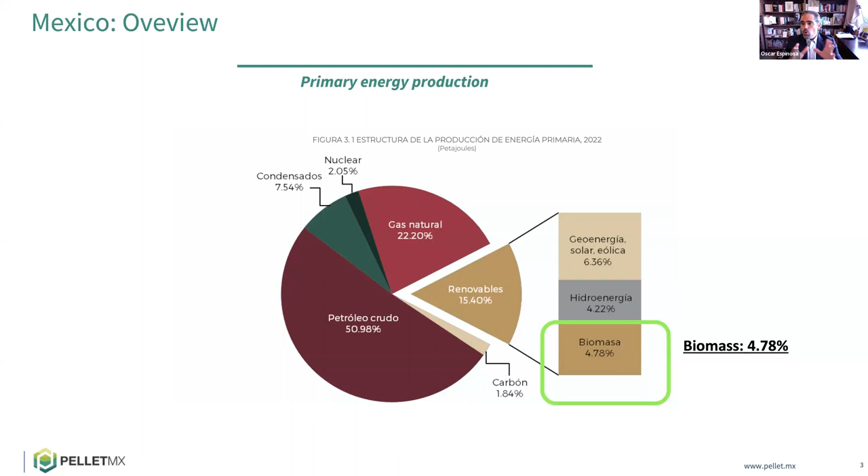We are accounting for 4.78% of biomass. Normally when you see this number, what you would see in Mexico is that the use of biomass would be traditional uses of biomass. Mostly, the most share of used biomass is wood for rural communities, cooking and heating with wood, traditional use of wood, and also cane bagasse that's been used for some years now in the sugarcane industry as a fuel for the production process. So as you can see, in Mexico we have a very small share of biomass in the primary energy production.

If we see the energy consumption in our country, in the domestic sector we can see a use of woody biomass at 24.6% of the total energy consumption. Regarding the industrial sector, we can see a participation of 4.21% of cane bagasse in the whole energy consumption matrix of the country.

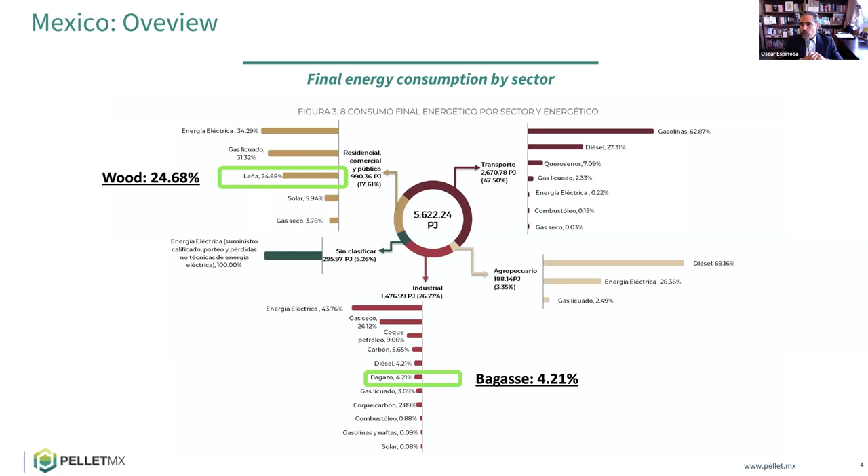So that being said, Mexico has a very wide opportunity regarding use of biomass, both processed biomass in solid biofuels like pellets. We are producing Pellet Mexico, and I'll introduce a little bit of our company afterwards. But what you can see is that the pellet production projects in Mexico are still very few.

We have three companies right now producing pellet products in the country. Pellet Mexico will have an installed capacity of 15,000 tons per year from 2024 forwards. Other producers like Todo Pellet are producing about 1,200 tons per year, and Forte Pellet is producing 3,000 tons per year.

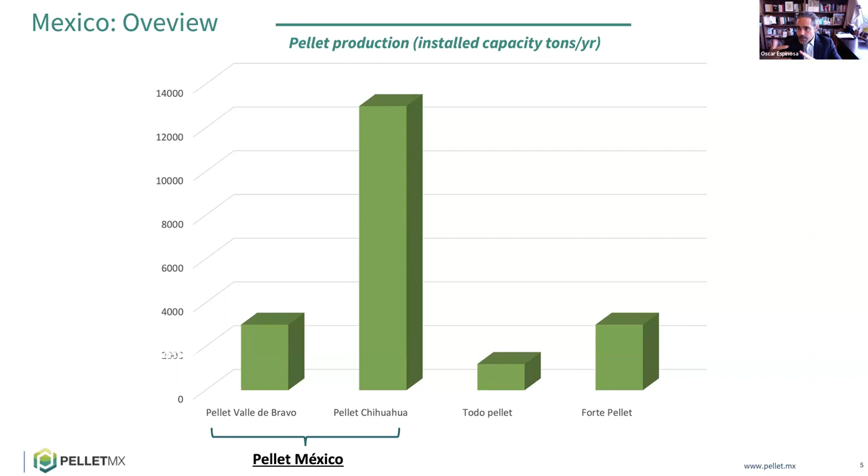Pellet Valle de Bravo is one of our facilities in the State of Mexico, and Pellet Chihuahua is the other facility in the north part of Mexico. So you can see here the different locations of the projects. Mainly you'll find projects in the central part of Mexico, in a region called El Bajío, which involves Guanajuato, Irapuato, Querétaro, a big industrial area. In Irapuato and Guanajuato there are two small pellet production facilities.

Then you'll find a facility in Arandas, in the state of Jalisco, another small pellet production facility. And in the State of Mexico, as I already mentioned, and Chihuahua, which are Pellet Mexico's facilities.

What about the types of feedstocks being used for pellet production? Normally in Mexico at this very small scale, it's wood pellet production. Although in Arandas, there have been a lot of efforts to use agave bagasse as a primary feedstock for producing pellets.

As well in Veracruz, where we have produced, in a pilot project to date, bamboo pellets and rice husk pellets. I would say a little bit more about the feedstock in the coming slides.

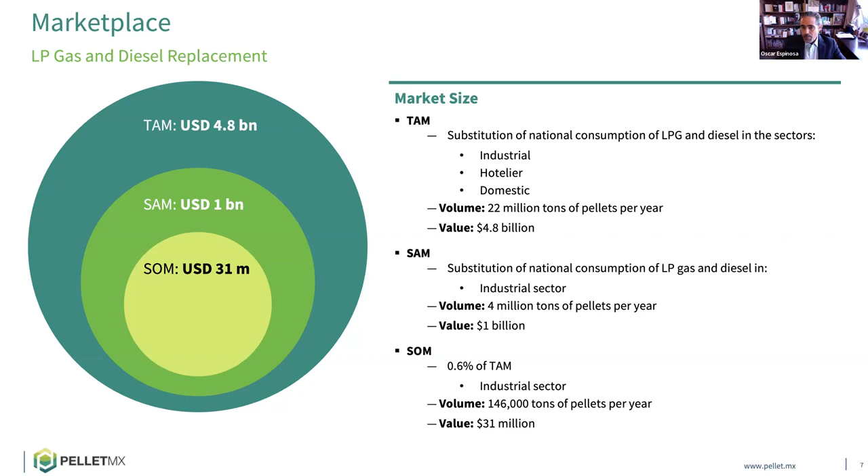I wanted to introduce this also - I don't have to say much about the global context and the challenge in our combat against climate change, and the decarbonization processes that have been going on to reach a net zero target for 2050.

What we see in Mexico is that Mexico's biomass energy potential is 1,600 petajoules. That's an assessment that was done combining both the sustainable use of forestry and the residual biomass from the different productive sectors and processes in our country.

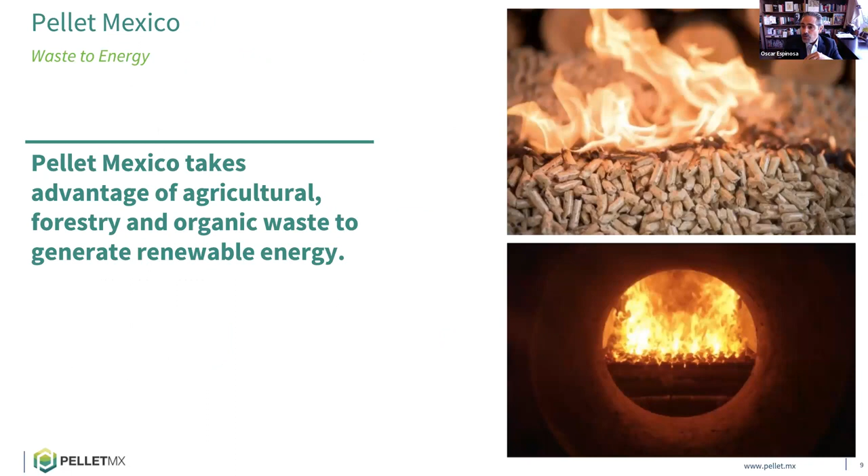So what we can see here is that we have a very big market opportunity as well as a more pressing environmental need. Pellet Mexico is the company we founded in 2016 that has been developing the whole value chain for a pellet production market for internal consumption in our country. What we do is take advantage of agricultural, forest, and organic waste to generate this renewable source of energy within a circular economy model in which we mitigate the negative impacts of bad residue management.

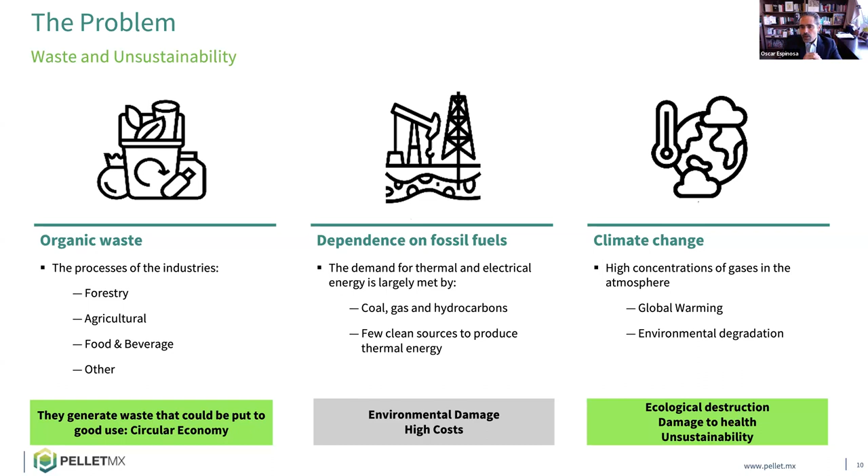We eliminate or mitigate the dependence on fossil fuels. As you could see on my first slide, the dependence on fossil fuels in Mexico still has a big share, and that way we promote a cleaner energy matrix.

So what are we doing in Mexico? We're seeing two solutions developed in the market. The first is biomass from productive processes in Mexico. As you may know, Mexico is a very big agricultural country, and its production of many agricultural segments is very important, both for internal consumption and for exports.

What are we seeing now? We're seeing that some agricultural productive systems could harness the biomass potential of their residues: avocado pit, mango pit, straw from maize and from wheat. We also have agave bagasse, since the tequila sector in Mexico has been growing very importantly, and palm rachis, since we also have a very important palm oil industry.

If we observe all these agricultural productive systems, we can see that there's a huge potential for biomass in our country, to use that biomass resulting from these processes to supply the regional energy demand of those productive processes as well.

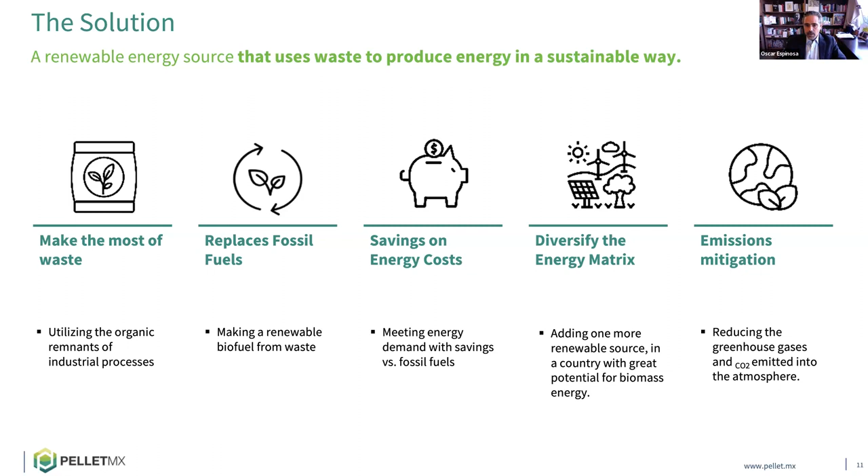On the other side, we have the pellet production process that we are starting in Mexico under a regional model, in which we analyze the availability of biomass in the country. We partner with local producers or companies that own these residues, and we invite them to invest in a pellet production mill in these different regions.

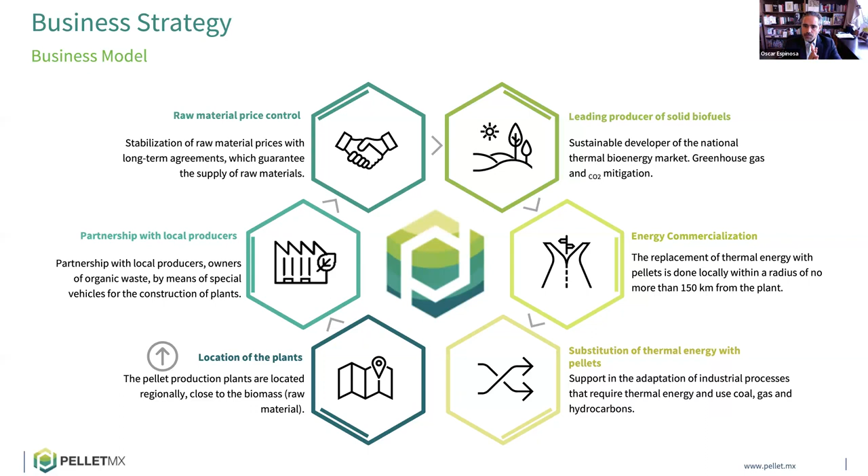Once the mill is active, we do a regional commercial strategy in which we substitute, in a radius of 150 to 200 kilometers, the energy demand, mostly LPG and diesel oil fuels. That way we are building a B2B market for pellet consumption in our country.

We are developing clients mostly in the industrial sector, and we deliver them three great advantages: first, the use of a renewable source of energy; second, mitigating CO2 emissions from industrial processes; and third, cutting costs around 20% regarding LP gas and around 40% regarding diesel oil.

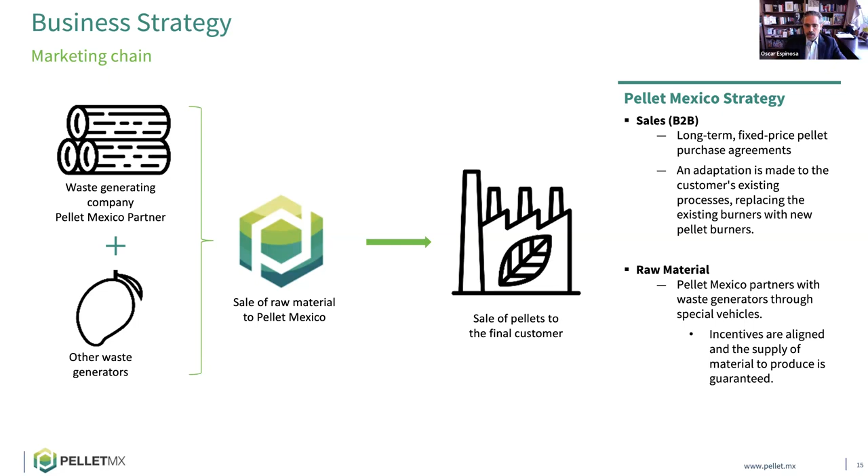Right now, Pellet Mexico has invested $2.3 million in its projects. We will have, as I mentioned, an installed capacity of 50,000 tons by next year.

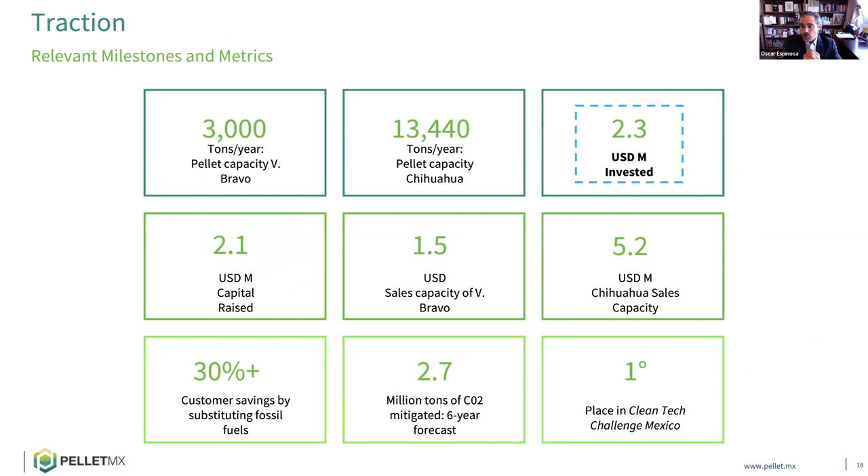In the long-term scenario, what we're seeing is a move from pine pellet assets—Valle de Bravo, Chihuahua, Jalisco—until we reach 50,000 tons, and then a move to expand the feedstocks we could use to produce pellets, with mango production, avocado production, and palm rachis, which we could harvest a lot from the southeast part of our country.

So that's mostly our project: these four assets of pine pellets, then scaling our model to Mexico's regional and sub-regional markets and to Latin America, and finally starting to be part of the export market, which is also growing at an important rate.

So that's us, that's Pellet Mexico, that's what's happening in our country. I hope this overview is interesting, and you have there my email and contact details for everything you will need.

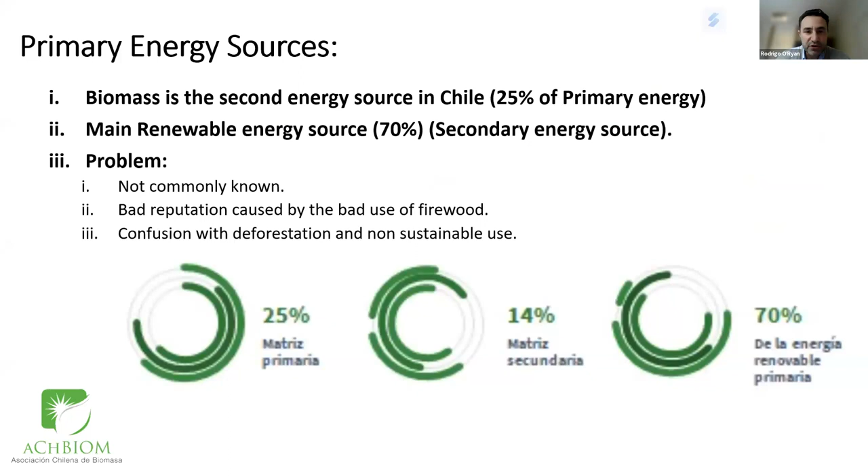The problem is that it's not commonly known and has a bad reputation caused by the bad use of firewood. We have a huge contamination problem in the southern cities of Chile because of bad, uncertified firewood used improperly in old and inefficient equipment. There's also confusion with deforestation and the unsustainable use of this fuel.

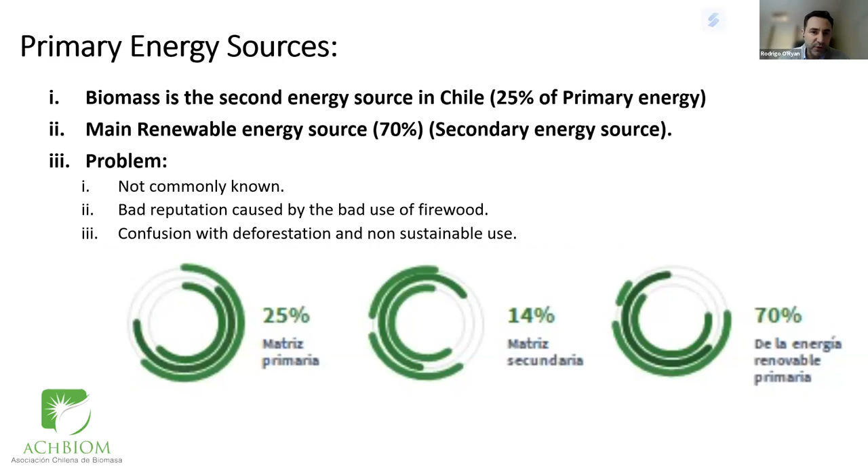Sorry for the Spanish graph, but we have 70% of biomass in the participation of renewable energy, and 77% of this 70% is used in a modern way for electricity, industrial purposes, and pellet production. 2% is geothermal, 6% is solar, 4% is wind, and 17% is hydro.

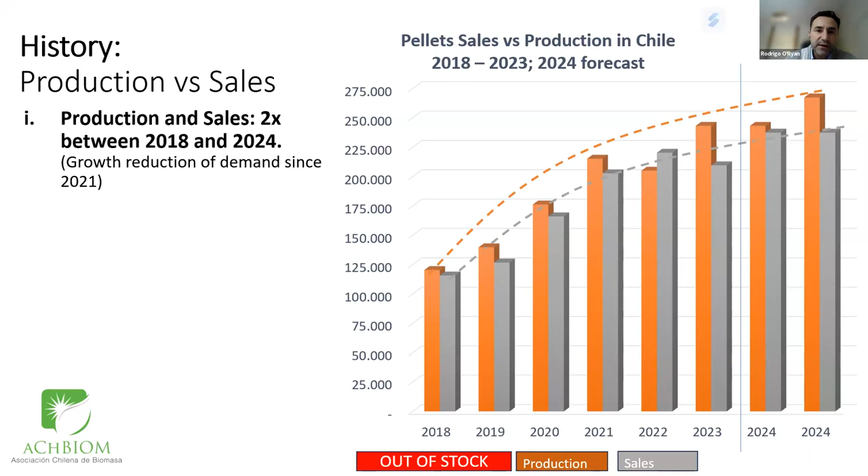Okay, now let's talk about pellets. This graph shows the production and sales evolution since 2018. We can see that during this period, production and sales have doubled. We started in 2018 at about 120,000 tons, and now we are reaching 235,000 tons. So it's a very relevant increase.

It's important to mention that in 2020 and 2022 we were out of stock. This was mainly caused in 2020 by a huge increase in demand, 31% overall, but in peak season it was more than 40%. Remember we were in lockdown because of the pandemic, so people needed more energy.

Even though the increase in production was very good, it was not so catastrophic as you may think given this increment. In 2022, we also had almost 9% increment in demand, and a reduction in production because of a lack of dry raw material, mainly caused by reduced sawmill production. So pellet producers started implementing new technologies like dryers and new kinds of shredders or chipping equipment, to be able to use other kinds of biomass like whole trees, and also to dry wet biomass that is available.

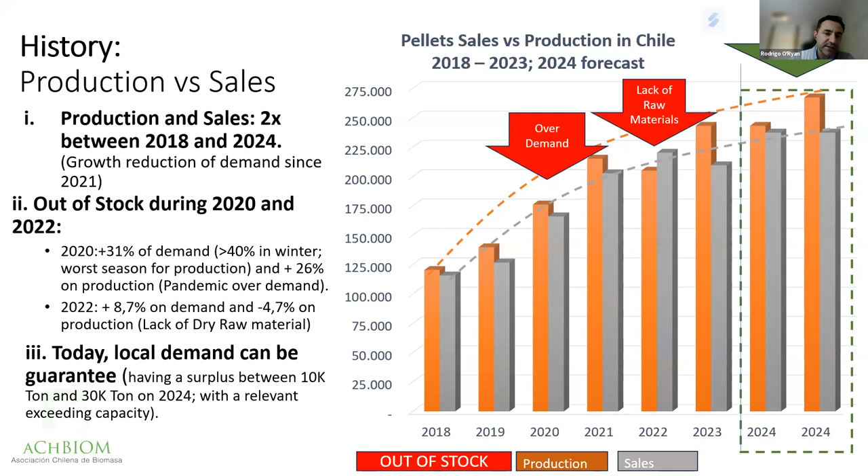Today we can say that local demand can be guaranteed. We have a surplus, and we consider that in 2024 we will have a surplus between 10,000 and 30,000 tons, with relevant exceeding capacity. We're going to see now the production capacity.

This graph shows on the left side the tons per year for installed capacity and production. The installed capacity are the blue bars, and the production are the brown bars. On the right vertical axis, you can see the utilized capacity.

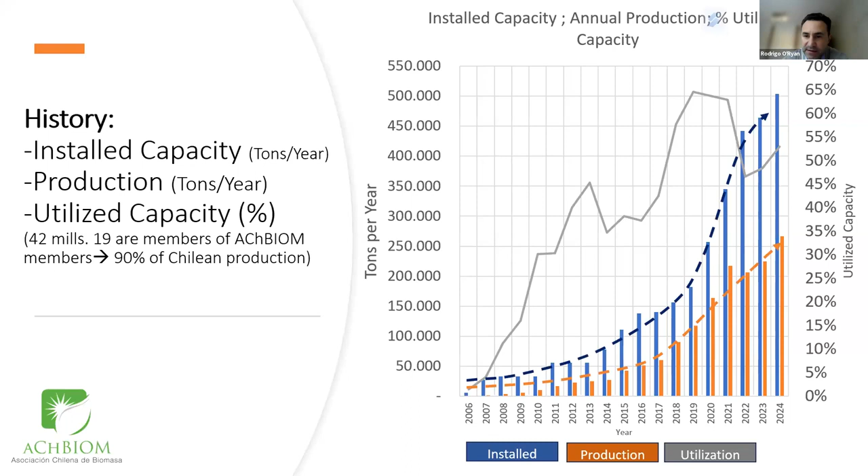You may see that it's quite an exponential growth of the production since 2016 and the projection to 2024, with a bigger increment rate in the installed capacity, especially in the period 2019 to 2021.

You may say, wow, why, if you increase capacity at those levels, were you out of stock? The thing is that some of the most relevant mills installed in 2019 started operating at the end of the year. So that was one of the causes of the lack of stock.

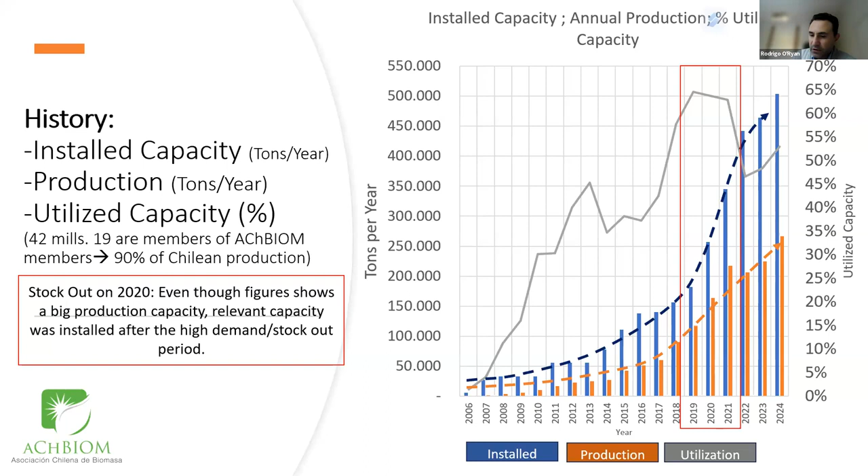How are the sales distributed in the market? About 94% is for domiciliary purpose. Then institutions have 4% of the market, and industrial purpose is 2%.

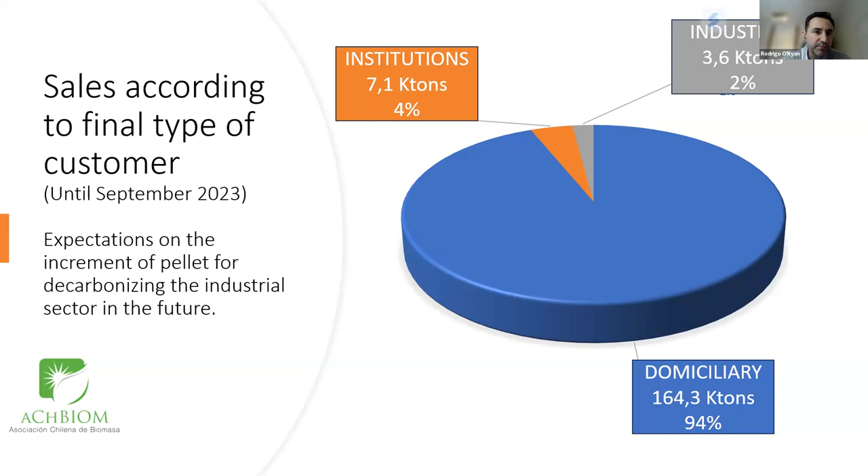We are focused on promoting the use of pellets, not only in the domiciliary market but also in industrial. Just the same, we want to promote the same trend that Oscar was saying, in order to increase the demand from the industrial purpose market.

Which are the public policies that we have participated in and that were developed not only with us? In 2015, an energy policy was elaborated that promotes an energy transition for renewable energy, and considers bioenergy as a part of it.

This is very important. Even though it is incredible that we are the main, or almost the main, renewable energy source, just in November of 2022 the solid biofuels were recognized by law.

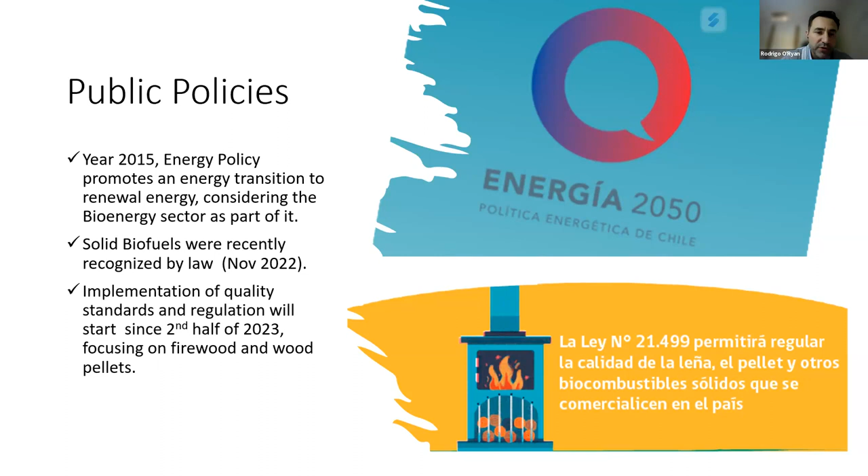That means some new steps have to be implemented, focused on regulations and assuring the quality of the biofuels. The implementation of the standards will start in the second half of 2023 and will be mainly focused on firewood and wood pellets.

This is a very good exercise that the government and the state started promoting and subsidizing: substitutions of contaminant and inefficient equipment, domiciliary equipment, stoves, for cleaner and more efficient equipment. This program has changed more than 50,000 pieces of equipment through the state until 2023.

From the private sector there has been demand for 2 times this amount of equipment. So we're talking about Chile having about 150,000 pellet stoves. 70% of the equipment chosen were pellet stoves. That is very relevant. People were very, very happy with this change.

This change made a remarkable reduction in particulate material emissions and also consumer satisfaction with the savings and comfort achieved by using pellets. I think this is a very good example to promote with local authorities worldwide in order to promote biomass use.

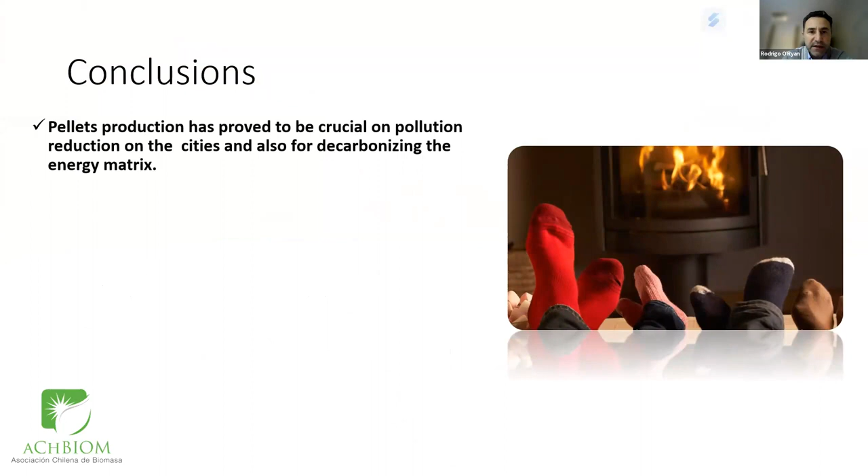Well, some conclusions. Pellet production has proved to be crucial for pollution reduction in cities and also for decarbonizing the energy matrix. Pellet suppliers have adapted their supply chain and productive process to avoid new stockouts.

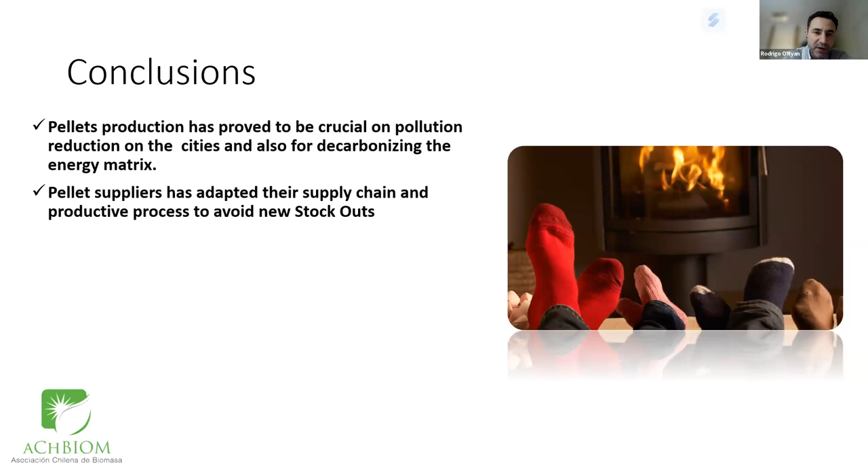It really was a turbulent period that created some bad reputation, but I think the commitment of our producers was very, very good, and that is going to be part of the past.

Today, installed capacity is much higher than local consumption, so this means there is an open possibility for exporting pellets. We make a call to international potential customers: we invite you to start talking with our producers. There is also a very good perception of wood pellets by consumers, despite the turbulence caused by the stockout during some abnormal behavior of the market and supply chain.

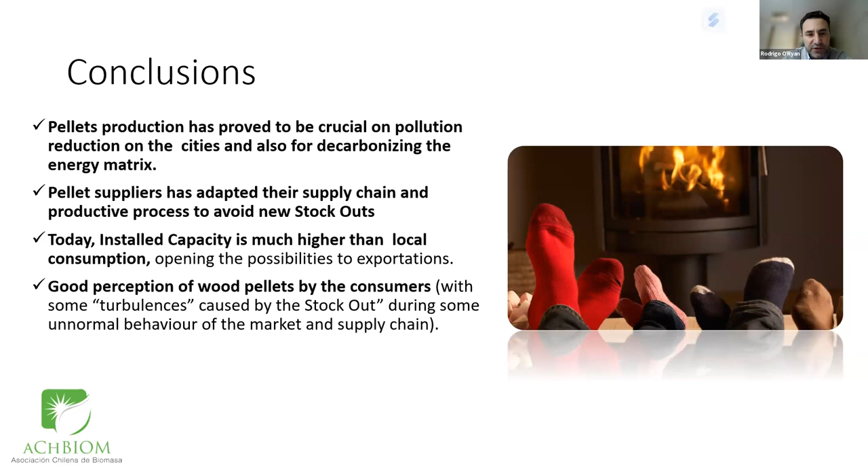I would like to say some words about our association. AChBIOM was established at the end of 2016 and started operation in 2017. It was started by 4 members. Today we have more than 45.

The pellet capacity involved represents 90% of Chilean production. What I mean is, the members of AChBIOM, the pellet producer members, represent more than 90% of Chilean production.

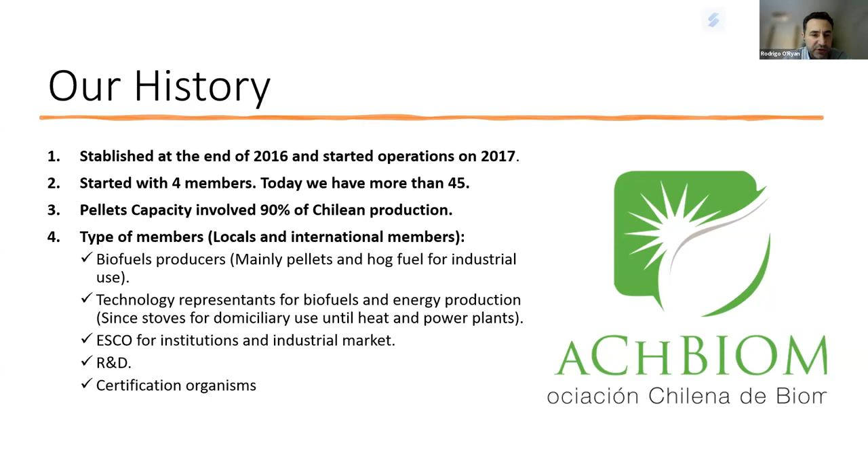What type of members do we have, both local and international? Biofuel producers, mainly pellets and hog fuels for industrial use; technology representatives for biofuels and energy production, from stoves for domiciliary use to heat and power plants; ESCOs for institutional and industrial markets; research and development; certification organisms; academy; and biogas producers.

Main actions of AChBIOM: we have become the main representative of the sector in front of private and public sectors. In the public area, we work with the Ministry of Energy, Agriculture, and Environment. In the private sector, we work together with all the forestry, industrial, and energy associations.

Internationally, we are board members of the WBA, with participation in specific and relevant committees and law definitions. As mentioned before, we were part of the National Energy Policy 2050, Forestry National Policy 2015-2035. We are involved in the development of air quality policies, also in local standards of biofuels committees associated to ISO 238, the international committee. We are members of a Senate commission called Chile Sustainable Forestry, where we promote the general use of forest and forest products as a crucial engine for the bioeconomy, among other activities.

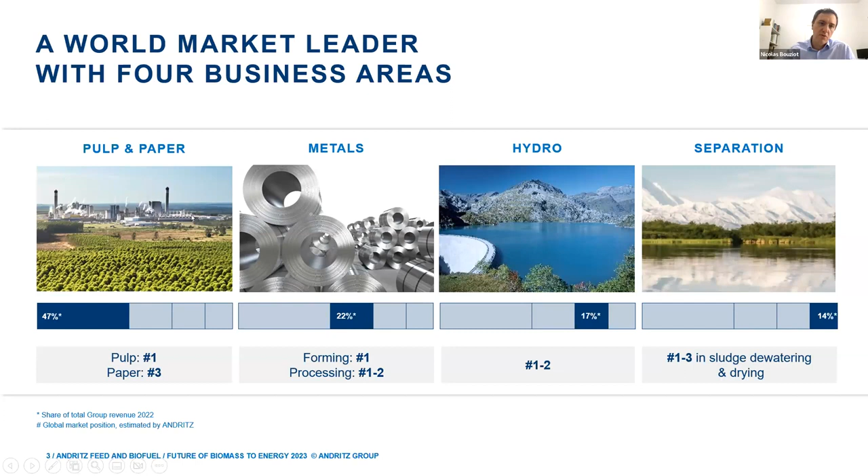If I go specifically to Latin America, we have offices with service, engineers and sales organizations located in Mexico, Chile, and Brazil, but also a number of partners covering the rest of South America.

What are we doing within Andritz feed and biofuel? We are providing solutions that allow going from the inlet of the raw material to the finalized pellet, wood pellet. This is what I want to speak about.

I want to split the case a bit, giving you some examples of what could be a project to make pellets in Latin America. I have made some segmentation to show what could be the interest, what could be the raw material, the inlet. This is really important to understand what is available, and fortunately there is a lot of raw material available in South America.

And who could be the end customer? It's really important to understand those two points: what do we have, what can we do, who will buy it, where it can be used. And in the middle, there is always a solution that can be found.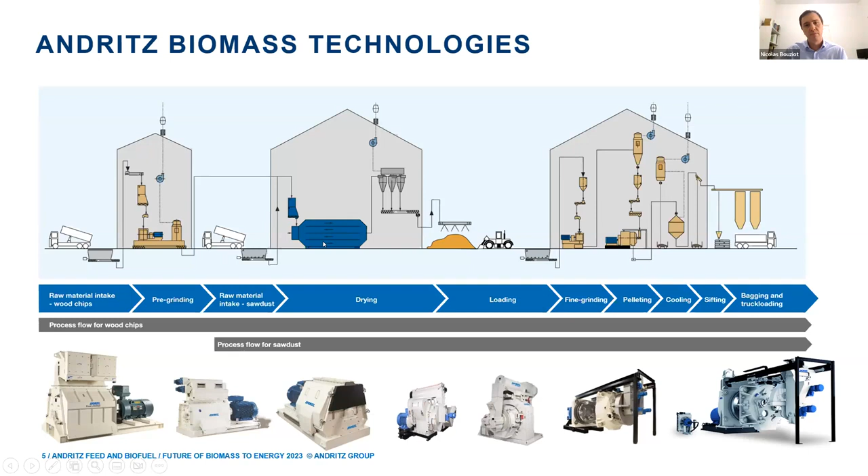I also take the opportunity to tell you that we are one of the main manufacturers of consumables for making pellets worldwide. So I will go through that, and I will end up looking at what could be the future of biomass to energy.

The raw material, really important to understand what we have. Usually we speak a lot about wood and forest residue. Wood could be logs, but also wood chips that can be wet or dry. It could be sawmill residues, meaning sawdust, shavings, and also logging residue - when we are working the logs we end up with some waste. This is really important to get a use of this and not lose it.

Then you also have other products - it's an extensive topic - but you have agri residue available. It can be rice straw, husk, straw, bagasse. My colleague from Mexico spoke about bagasse. It's also definitely a topic in South America.

And on the right side, you also have what is related to energy crops. When you see frass, it's manure - it's also an energy available from residue from animal breeding. But what we mainly see as raw materials in South America is

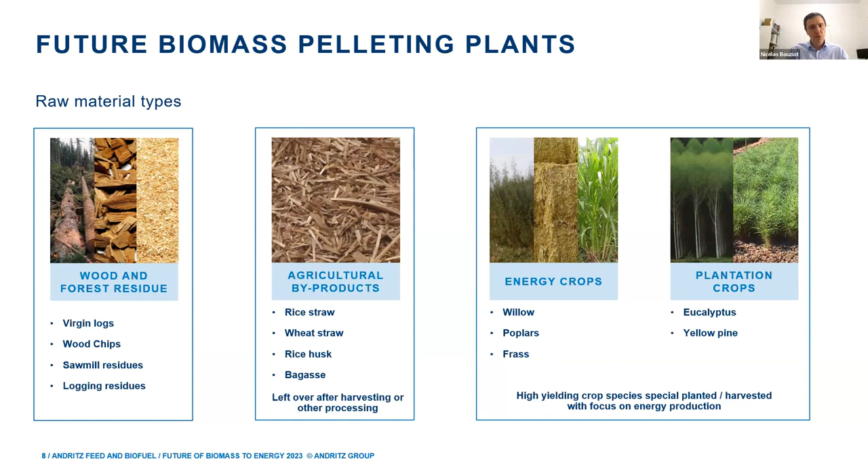I've split a bit what could be the business case for people who want to start making pellets. The first option, the easiest one, is obviously to have some dry fiber. What is dry fiber? It's sawdust or shavings that we have from an existing wood transformation activity - somebody making furniture or pallet production or whatever, and you have this dry material available. This dry material can be easily converted to pellet through a step of grinding, pelleting, cooling, and packaging. It requires really limited investment.

I have shown, for example, a kind of small modular line that can be easily installed internally. The typical customer is definitely a local market. I was listening to my colleague from Chile, Rodrigo - I was in Chile last week. I can tell you that's definitely the kind of customer that already has an activity and has small production because they have this raw material available, easily pelletizable, making installations that can go from 2 tons to about 4 tons per hour.

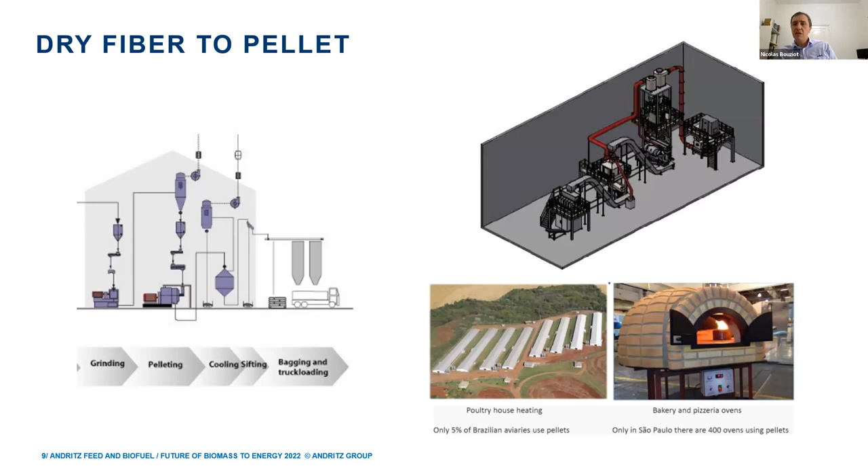Second case can be a dry bale. When I say dry bale, I mean straw. It means that it's available as a residue that you can have as a bale, and you want to use it later on to make a pellet. This pellet will also require a bit more processing because you may need a process that could be trickier to handle, and you may need to dry it. This is also something a little more interesting, you go to a more industrial solution in that case.

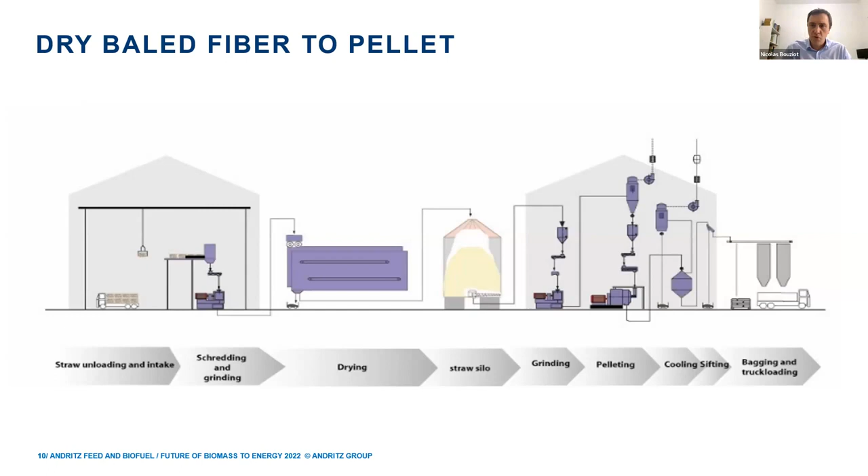To give you an example of what can be used, I took this example of Drax that is already doing this kind of project. Typical utilizations can go to, for example, those straw pellets, to bedding for animals. It can also go to a later conversion, and we can see that today in Europe they're going toward, for example, changing the process a bit for gas generation, a biogas purpose. So it's pretty interesting because we have a lot of residue in that case available that we're not using today because they're not the easiest ones, none of the top list.

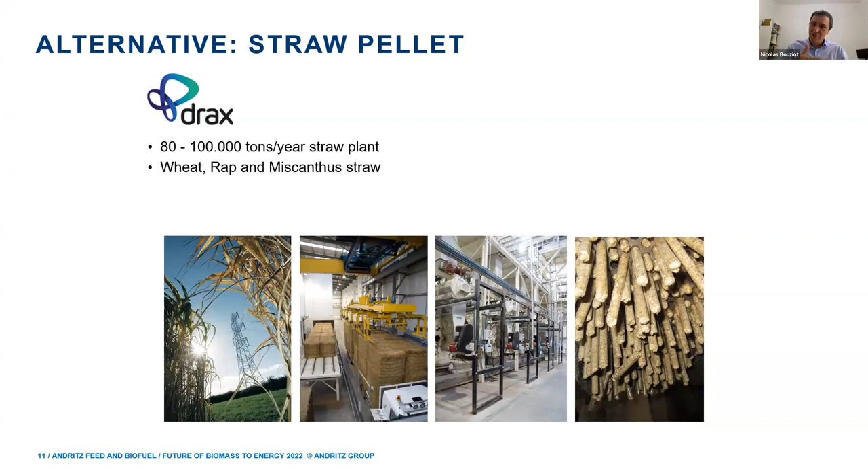Of course, if I go back to the first one, using nice dry sawdust from pine is, let's say, the sweet cake. It starts to become more difficult when we arrive to this kind of raw material.

If I go to the next step, let's imagine that you don't have enough dry material, so you have to start using wet material. What could be the wet one? Wet chips of wood. And suddenly you start to go to a more industrial solution, meaning you'll be above 5 tons per hour, up to, let's say, 100,000 tons per year. Let's say you can make this kind of installation.

Definitely you start to have something interesting that can still be used locally. I've put some examples again from my colleague in Brazil, where you can see people put a heating solution for heating a hospital. There's a water park where they are heating the swimming pools with wood pellets during the winter. I also show you, on the third picture, a hotel that is heated with wood pellets. And finally, you can see a number of other applications that can be used locally.

I want to remind as well that if I take the example of Brazil, only one third of the production you mentioned, Christian, remains in Brazil, and two thirds are exported and go, let's say, a bit everywhere. It can go to people that have a policy and are pushed to change and convert to biomass, can be Europe, can be Asia, who are really demanding a lot of pellets today, and in the future it will continue. I can give you an example from France: we have coal plants that will convert. It will be a demand of millions of tons required to just cover those two plants in France. So you can see, just to give you a scale of size, what the demand could be.

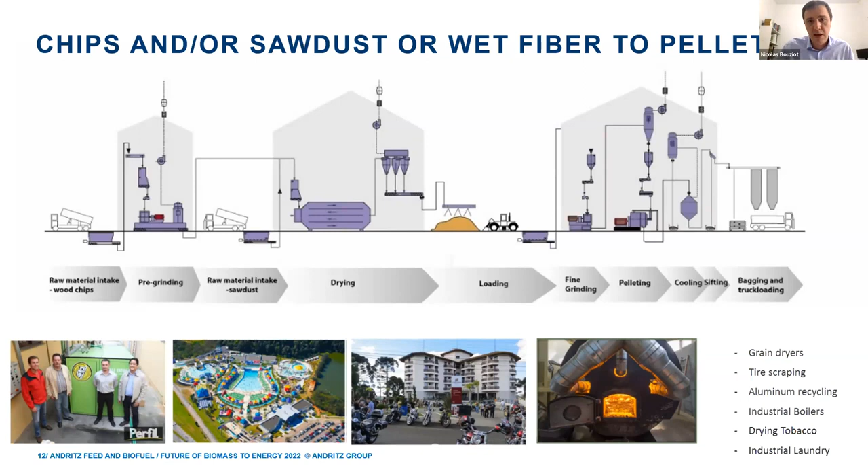Let me jump to an example of what an installation of such size could be. You have, let's say, for 150,000 tons of eucalyptus, 4 pellet mills, for example, which starts to be a reasonable industrial activity.

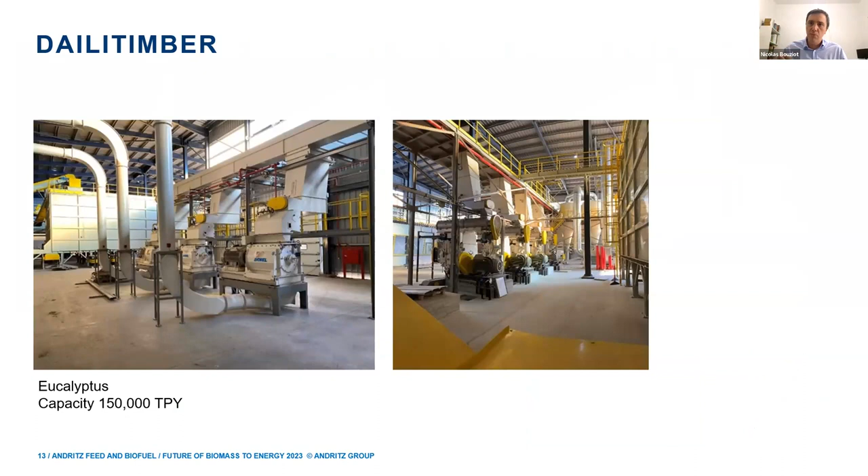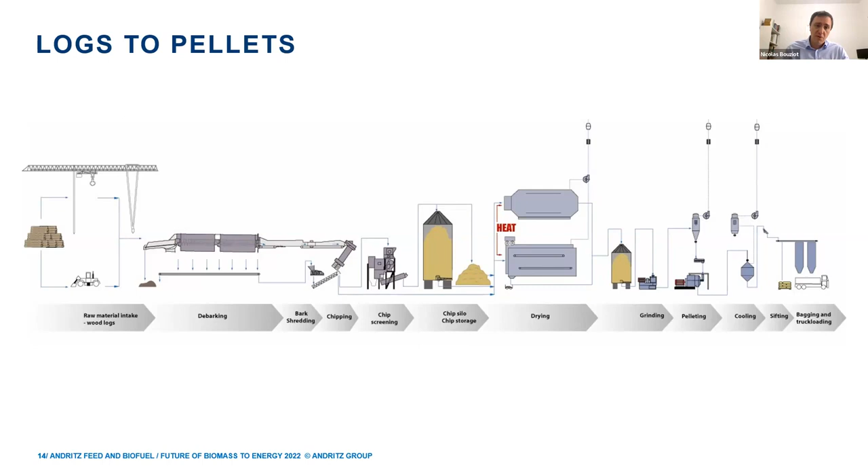Finally, I go to the last type of project, the big one, where you start with logs. You need to debark them to remove the mineral content, because we don't like so much mineral in the pellet mill. This can be a real challenge in terms of operational costs, and you can see that we have much more process line here.

Then you start to go to the size of project that can be above 200,000 tons a year. It's definitely this type of project where you're going to have industrial customers that are abroad, so you need to have the logistics for transport. We start to see this kind of project popping up in South America, because the resources are available. So definitely there will not be thousands of projects like that, but we see them coming.

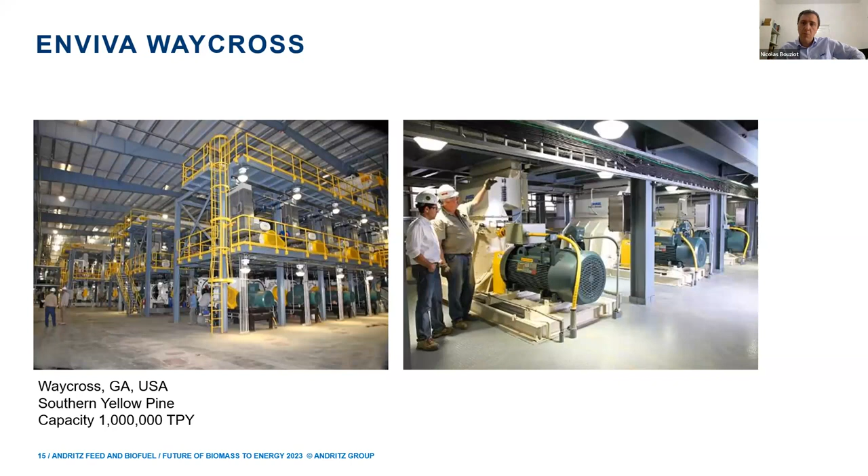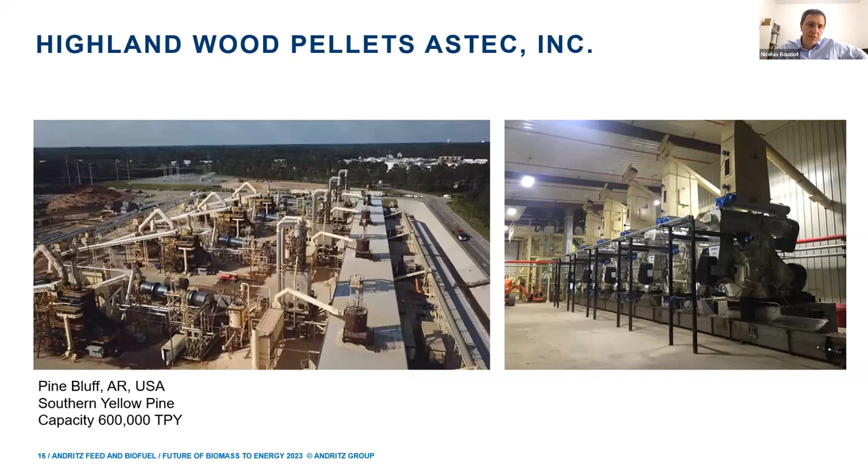That's why I wanted to raise that. Today we already have ongoing projects, or let's say engineering projects, coming up with such a size. I'll show you again some examples based out of the US for a big scale project of this type.

Finally, I want to go a little bit into the next step for the future, just to remind people that we're speaking a lot about wood pellets, which will be the next step for sure. But let's not forget that today, this is what we have as raw material: it can be wood residue, agri-based residue, waste and recycled material.

We go through those process steps, which are mechanical steps, to make what let's say is heated pellet. A lot of other processes are to come to use these resources to make them available for what will be required for the next energy challenge we'll face globally. And definitely Latin America, as usual, has huge potential and resources to attend not only herself, but also a lot of what will be required abroad.

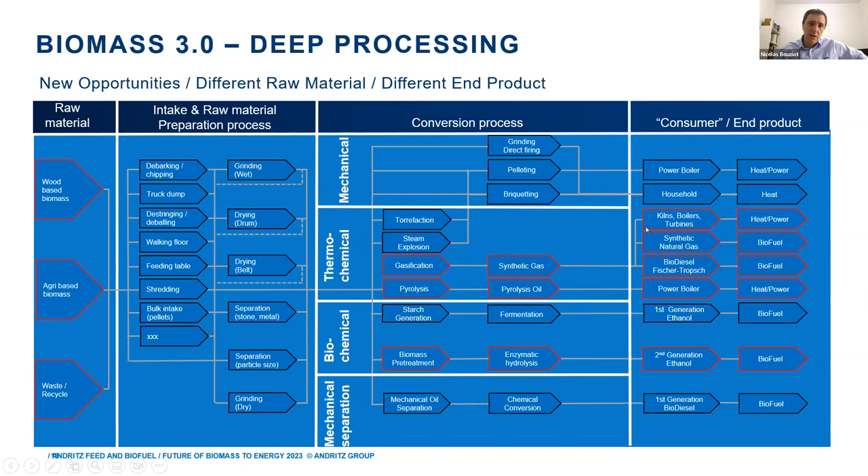Finally, I think I've kept my 14 minutes. I apologize, I've gone through this a bit too quickly. In any case, you can contact me.

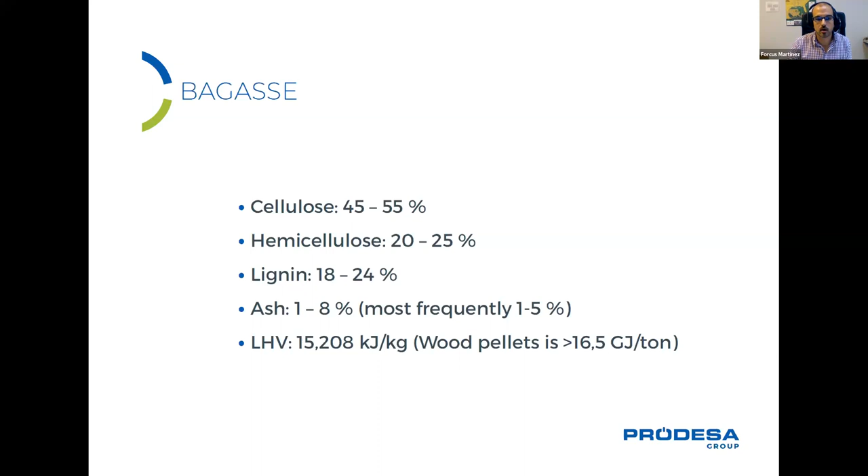We will see later on a slide how we design the plants to minimize this effect as much as possible. With regards to heating value, we are a little bit below wood, but very close to that. So it's a very good product to produce pellets of.

Within bagasse, we are seeing two profiles of customers in the region, in Central and South America. The first are places, countries where the price of electric energy is high.

Normally, bagasse producers in these countries don't have a big motivation to produce pellets out of it, because their main motivation is to burn bagasse to produce electricity. We're seeing this a lot. So if they are able to pre-dry that bagasse instead of burning it directly, that's a benefit for them. They make their cogeneration units more efficient. We have to remember that they are producing electricity to sell to the grid, and on the other side, thermal energy that they use in the sugar mill. So if they can dry their biomass a little bit before burning it, that's beneficial for them. They can be more efficient on the combustion and then have a little bit more feedstock to extend a little bit their production beyond the harvest months.

So in this type of projects, a belt dryer is a very good combination. We use heat coming directly from the sugar mill. We put the product in a layer within the dryer, circulate hot air, and dry the biomass, the bagasse, to the moisture content that is required. For these purposes, normally in the range of 20%, is good, even above that sometimes.

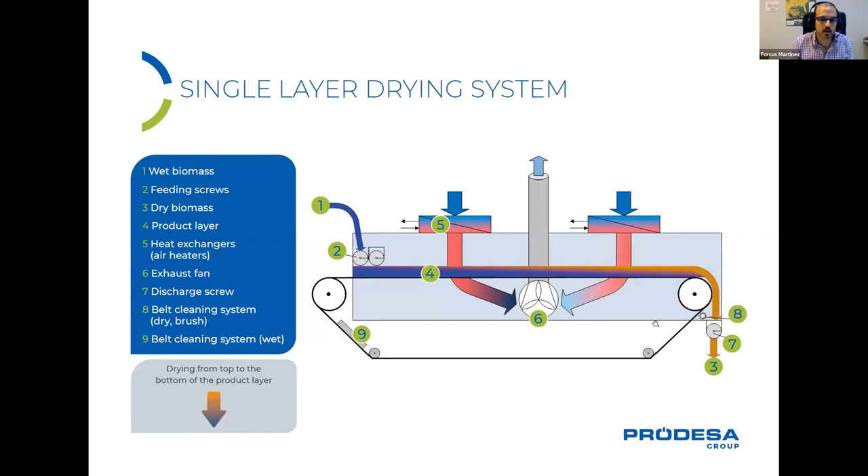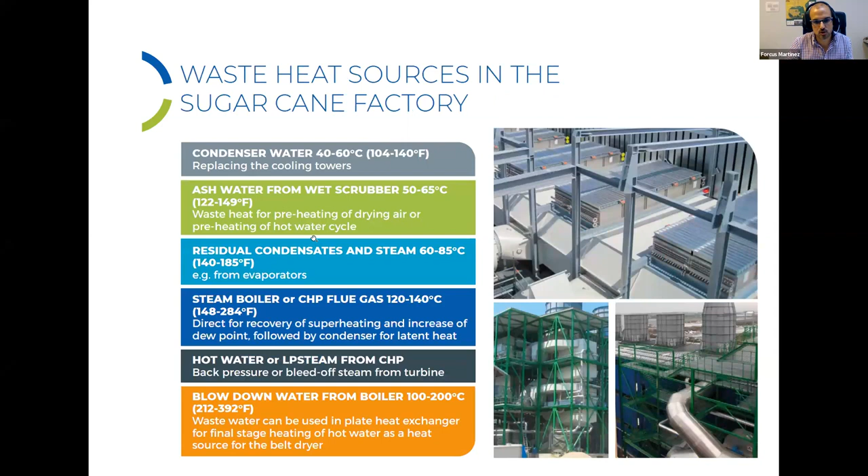We can use hot water, low pressure steam, or hot air from the factory, from the sugar mill, and you don't have operational costs associated to the drying. These are different features of the dryers. We can work in between 1 ton per hour and 30 tons per hour of evaporation.

Then the second type of region is where the price of electric energy is low. This type of producers of bagasse don't have a motivation to produce electricity out of it. So they're going to use their bagasse to produce the heat they need in the sugar mill, but also all the excess of the bagasse, they will use in agro industries to produce compost. It can be sold to pulp and paper, used in animal feed, or to produce bagasse pellets.

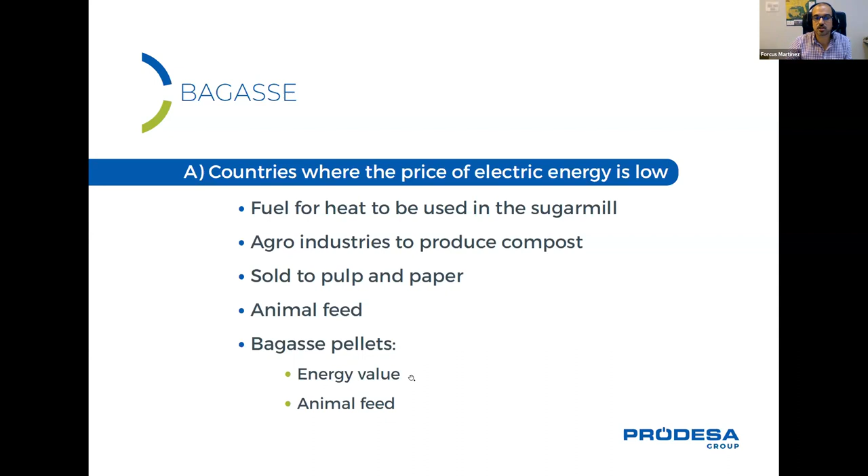We are currently working on a project that is under manufacturing in Mexico for the production of pellets from bagasse. These pellets can be sold for energy value or for animal feed.

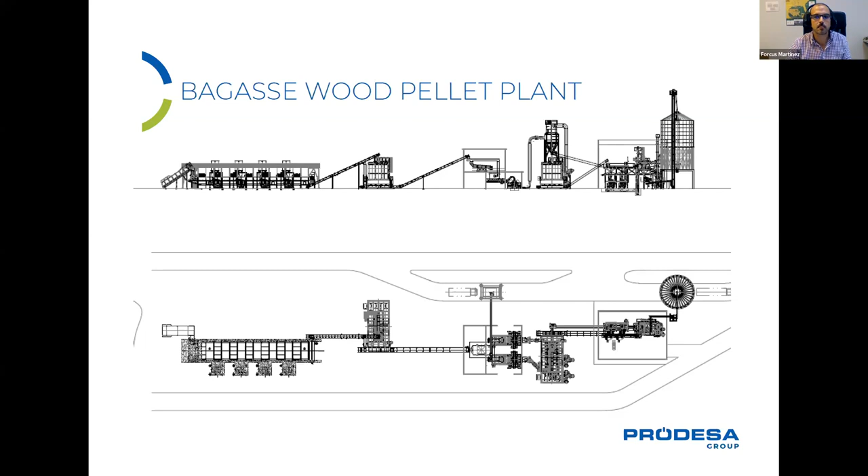So you have a product that is as clean as possible and you reduce the operational cost associated to wearing components. And then hammer mill and pellet mill. This is just belt dryer, the type of storage that we use.

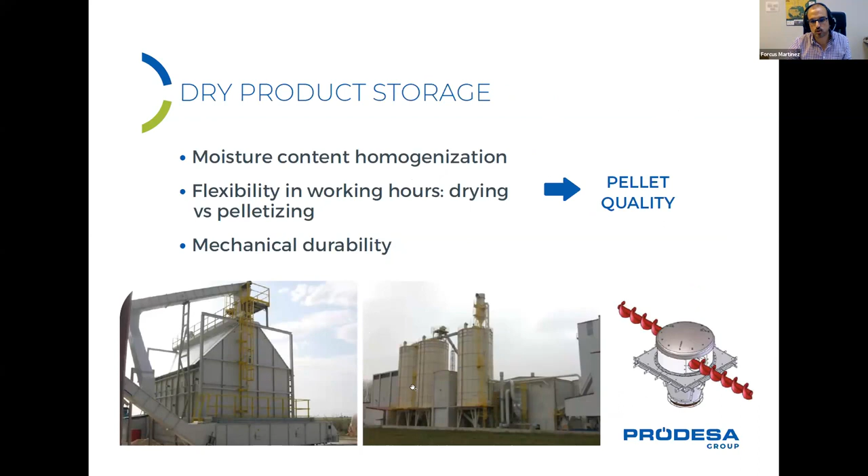We like the horizontal type of storage because it avoids bridging. We can also use vertical storage systems when we have a good particle size. Screening, milling, and pelletizing, no?

The other type of product we have divided the presentation into is wood. We see a lot of interest from countries like Brazil, Chile - that's from the number of inquiries that we receive and we work in. Those are the ones leading the region, but also Argentina, Uruguay, Mexico are areas where we're seeing a lot of movement. Also countries in Central America, Colombia and Peru, but with less frequency, no?

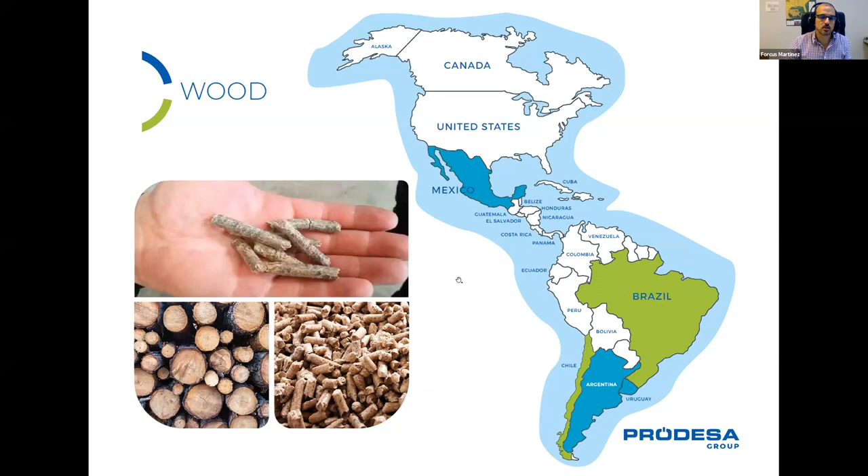This is just the standard of wood pellets, industrial, the pellets that are exported to Europe. Ash content, very relevant, below 1.5 when we're talking about I2. Durability parameters in the range of 97, above 97 is the request. Fines, you have to be below 5%.

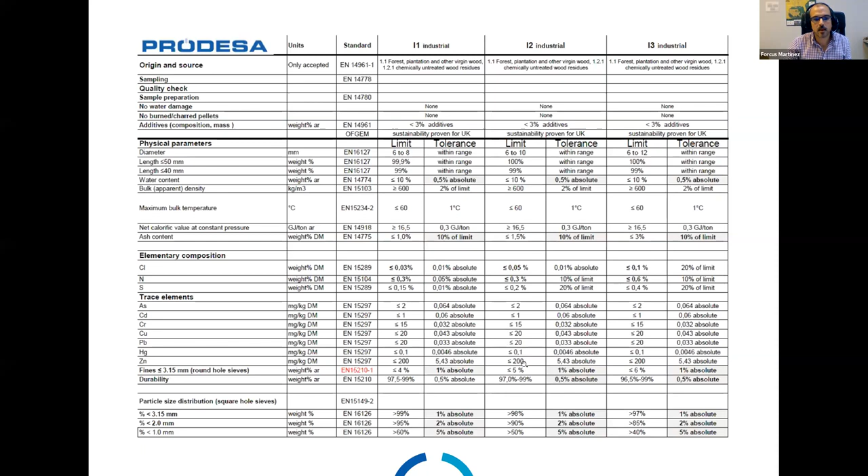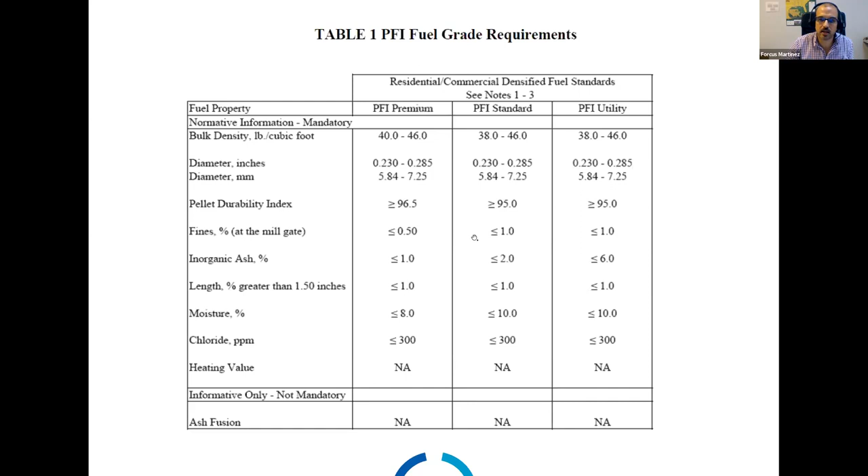If we're targeting the residential market and not the industrial, ash content is a little bit more permissive. We have more allowance, and durability has also a little bit more allowance. Although generally you don't find allowance on fines because you're going to burn it in stoves or domestic applications. You don't want to have a lot of fines, no?

However, most of the times in local, in Central and South America, we find that pellets are not going to be exported. They stay local, no? And they are used for industrial applications or for heating appliances. In this sense, the quality of the pellets, durability, ash content, are dictated by your buyers, no, and also the feedstock that you have, no, that play a role on it. So that's something also relevant.

Why do they stay local? Normally because the logistics and the economics to the port are more difficult, no? Because distances, also ports, sometimes the logistic of the ports is also difficult for exporting, and the freight costs sometimes, depending on the country, is not helping, no? So still a development to be done there for sure.

So three typologies of plants with regards to wood. Capacities below 2 metric tons per hour generally find a difficult feasibility, no? In our experience, it's difficult to have a pellet plant below 2 metric tons going on. Capacities in between 2 and 5 metric tons per hour.

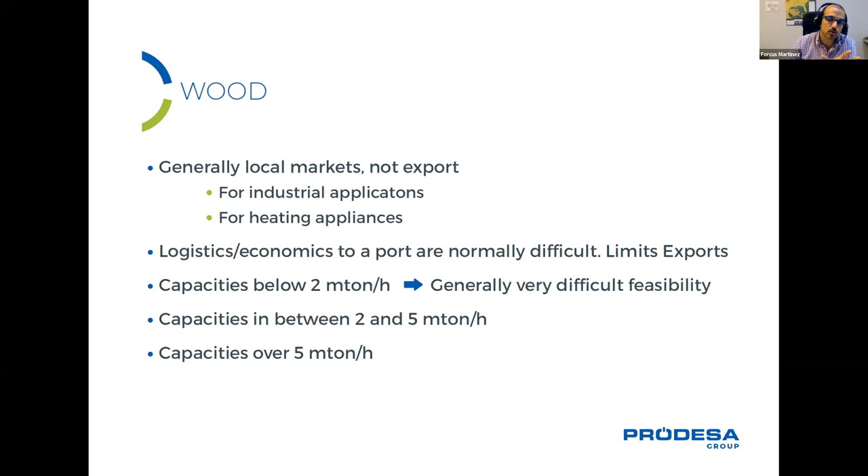And then when your capacity is above 5 or 10 metric tons per hour, you have other requirements, that is going to mean that you have to increase capex proportionally. I will talk a little bit more of this next. So when you are in between 2 and 10 metric tons per hour, you need to be very efficient in the design, just to put whatever is essential to keep capex under control.

This is an example of this type of plant. We have this is a plant that is going to be fed with wood chips. So we have hammer mill, wet hammer mill, dryer, belt dryer in this case, and the PelletBox, no, based on one pellet mill. And this, in this case, it's extensible to 2.

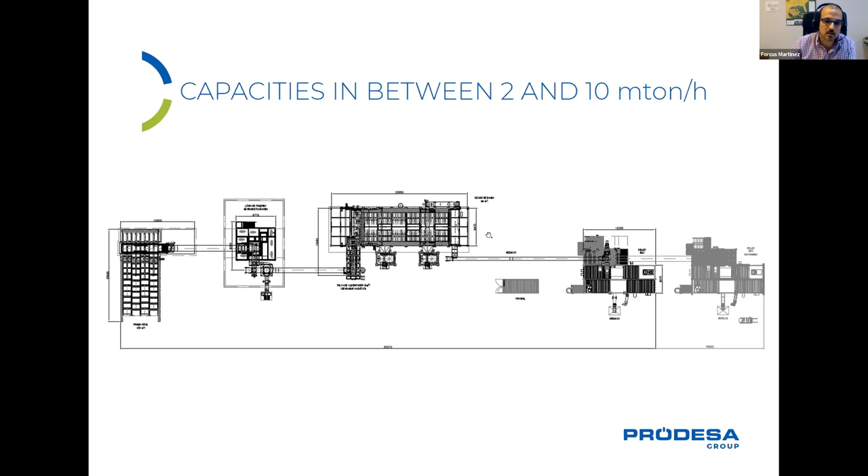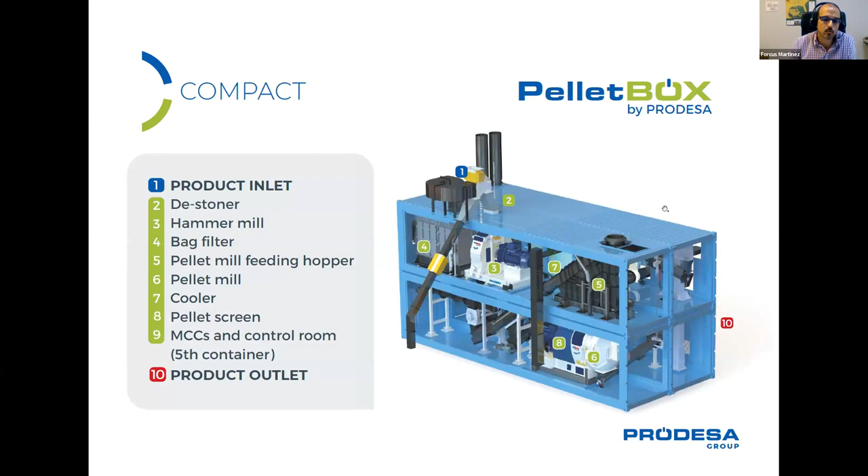PelletBox is a model of plant proprietary from Prodesa, where we provide a complete pellet plant after the dryer in 4 40-foot containers. So we have the hammer mill for dry product, the pellet mill, the cooler, the sifter, all integrated in 4 40-foot containers. Then we have a 20-foot container for the MCC room and one other for the control room.

It's a very compact design, modular. You can have 1, 2, 3 next to the other. So you can increase capacity from 5 to 15, 20 tons per hour, depending on the modules. Reliable, designed to work 24/7, just like a standalone pellet plant, and more economical because everything is pre-assembled, pre-wired in our shops. So when it gets to the site, it reduces a lot of installation costs. And also you don't need a building because the container works as a building themselves, no? And mobile in the sense that you can disassemble it in the future and move it to a different location.

When we are in capacities above 10 metric tons per hour, your project has other constraints. For instance, you will need to plan for the logistics of your raw material. If you have different raw materials or different wood species, you're going to have to blend them in your plant before processing, and you need to make sure you're always blending them at the right rate.

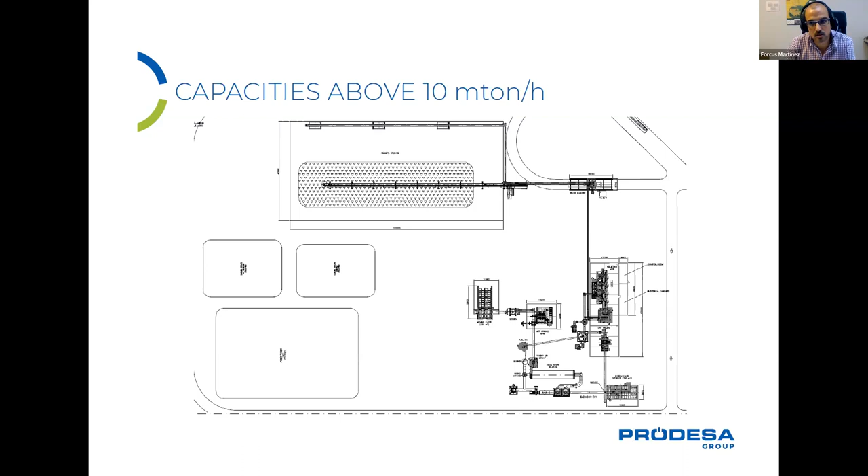You also need to think about what you're going to do with the pellets. You may have to store them for a longer period of time, or store them at the port in case you're using a port. You'll also need some buffers in between the lines to increase the availability of the plant, in case some equipment is under maintenance, for instance the pellet mill when you're changing die rollers, so you can still keep running with the rest of the equipment.

In the third category of my presentation, we have other biomasses. Peanut hulls, for instance, we have a 25 metric ton plant working 100% with peanut hulls. Those pellets are being sold to Europe to be blended with wood. This project is not in the region we are discussing, but it could be brought here. It's just an example, but it would be very feasible in the region.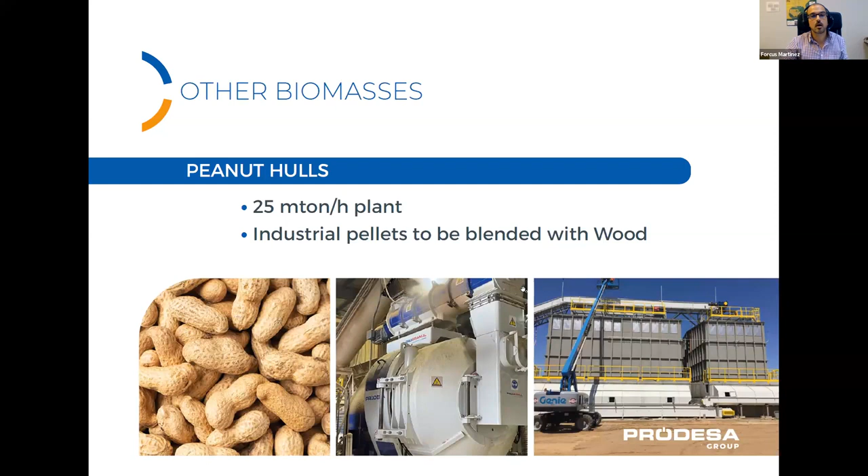We also work regularly with other biomasses: agave bagasse—Oscar was talking about this in the past too—cereal straw, rice hulls, PKS, pomasse, and others. In our experience these projects are normally more on the small side, somewhere between 2 and 5 tons per hour, and their feasibility has to be checked on a case-by-case basis, because many things affect it, like where you're selling the pellets and how much you're paying for the raw material. All this needs to be taken into account in the feasibility model.

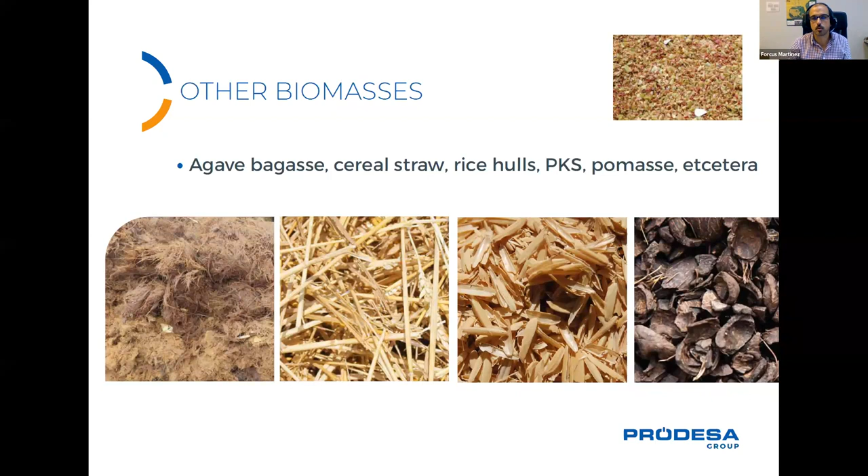So this is a little bit of our experience in the region, Christian.

Thank you, that was excellent and a very nice overview of how wide the possibilities are to use biomass and upgrade it by pelletization. There was a question in the chat on why you would pelletize bagasse if you could use it for cogeneration. Can you say a little bit about that?

Yes, if you use it directly for cogeneration—it's a very good question, maybe it wasn't clear enough in my presentation. In cases where the bagasse is produced at the sugar mill and burned there, you don't need to produce pellets; you can just burn it directly. That's what we and our customers are doing. What we do is dry it to make the combustion process more efficient. But if you're not moving the product to a different location and you're burning it directly there, you don't need to produce pellets.

There was one final question in the chat noting that our presentations this afternoon were mainly focused on the feedstock, not on the use of the pellets, and I think that's important to address. If you want to use pellets, you're constrained by the technology available. So as soon as you go to agricultural pellets with high ash content, you would typically rather use them in an industrial context, because industrial boilers are able to handle high ash fuel.